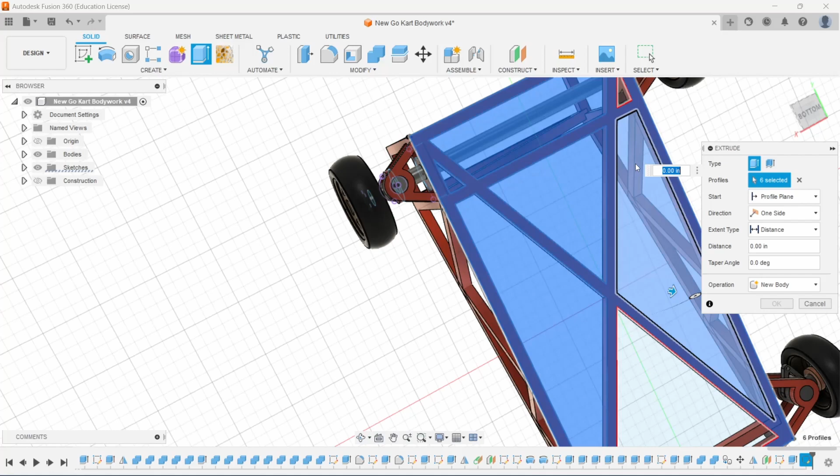I'm going to start off by extruding. I have to select the profile, and select all of this part. I'm going to extrude this about a quarter inch. I'm not going to join it, I'm going to create a new body out of it and make it 0.25 inches. Hit enter. And there you go, we have our floor panel for our go-kart.

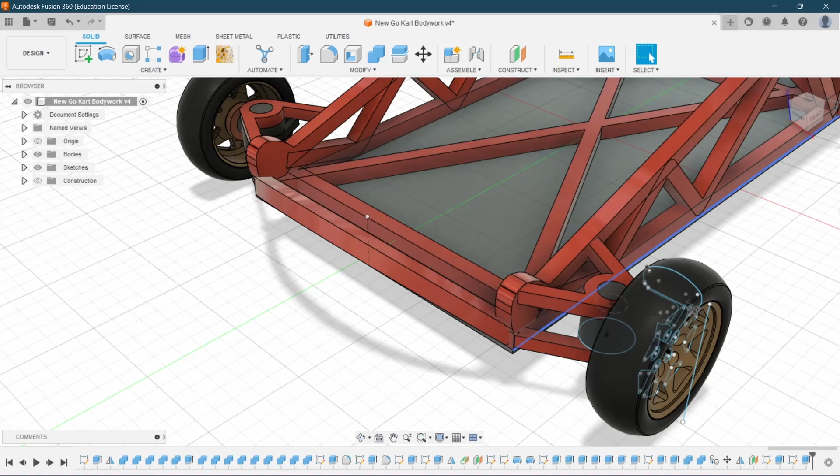Next thing I want to do is design another floor panel for our go-kart, and that will also come up here. Hopefully it doesn't interfere — yeah, it's not.

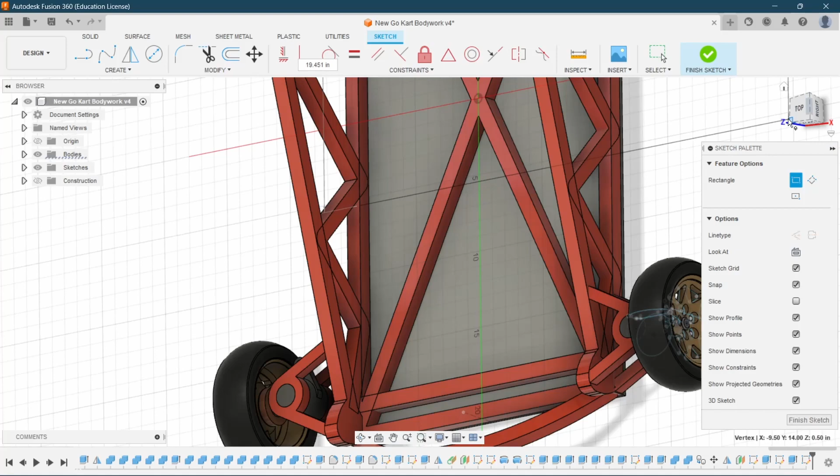I'm going to go up here, create sketch, hover around here, and select this interior piece. I'm going to create a rectangle, a 2-point rectangle, and select this interior, pull this all the way into... let me go around here a little bit. I want to point this just about here.

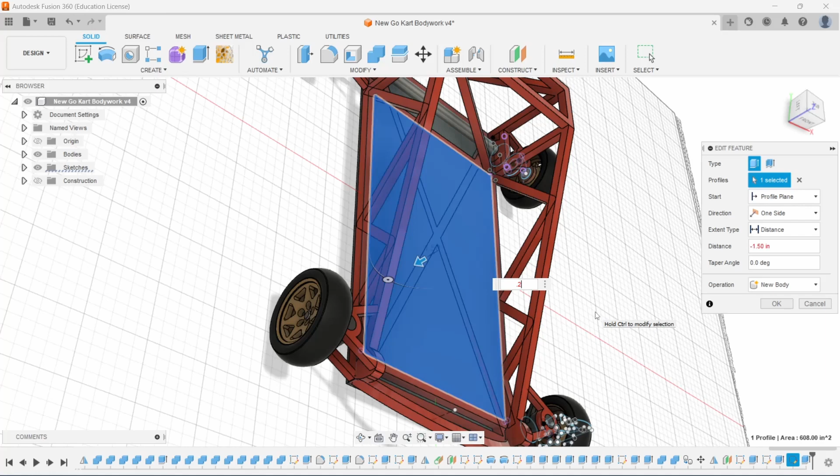That should be great. I'm going to go to solid, extrude, select this part — actually I want to select this part, deselect this one. Then I'm just going to extrude this body and give it a quarter inch. Oop, wrong one, let's go back and edit feature, 0.25. That's a new body, by the way. So let's check this, see if everything checks out. Yep, everything checks out, so we'll click OK. Now we have ourselves a floor panel for our go-kart.

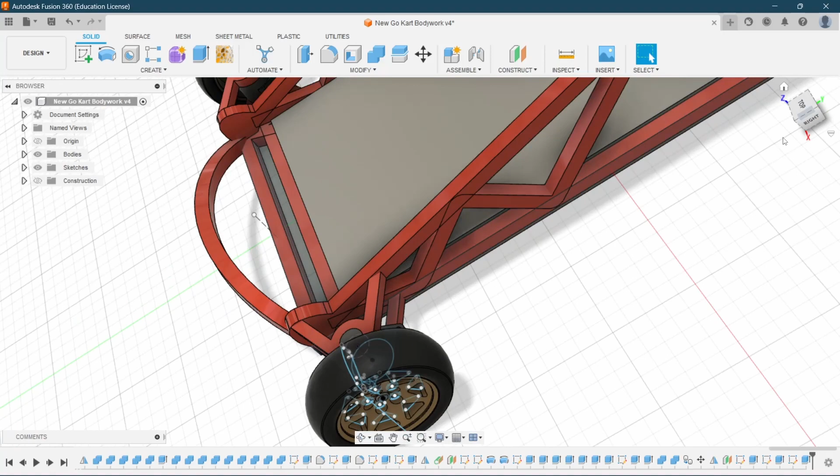That's good. The next thing we're going to be doing is creating our steering rack or control. What I'm going to do is create a pin that goes into this hole and gets bolted down, and this pin is just going to go up into a control box that will control our wheels.

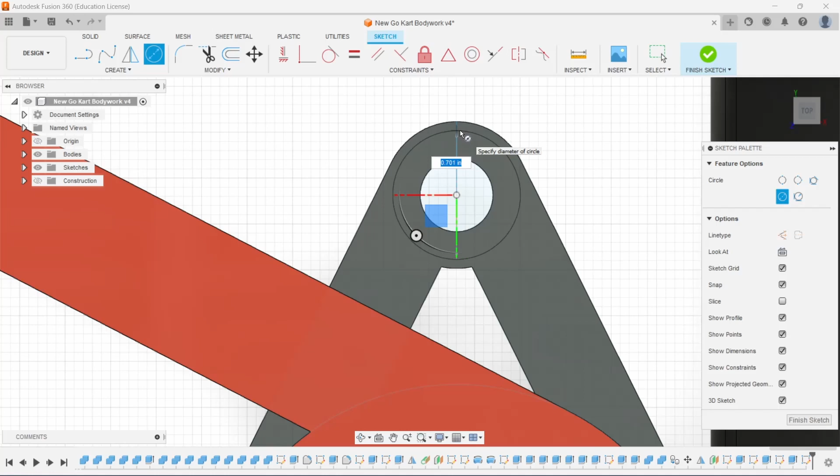I'm going to start off by creating a sketch, hitting this side, selecting circle, and putting this circle up here. Let's make it about 0 — let's try this side. Yeah, and another one, which is going to go in about here. Hit escape.

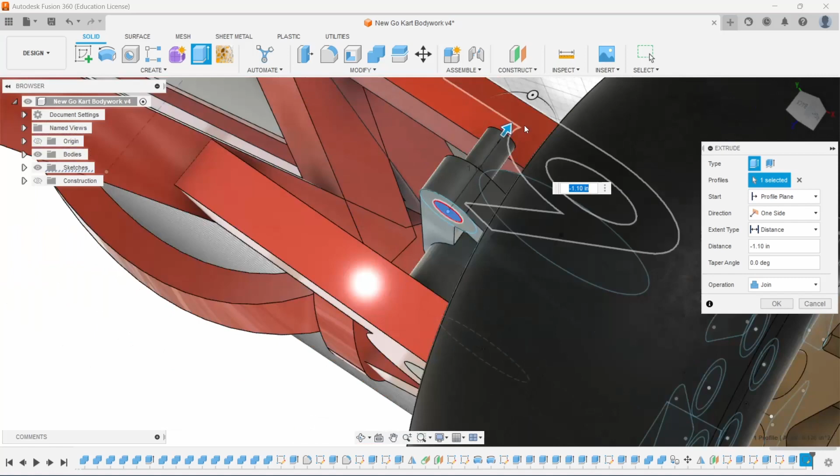First thing I'm going to do is extrude this. I'm going to pull this pin in here, give it about an inch and a tenth, make it a new body, and hit OK. We're just going to go back.

Edit feature again, select this part. Move this — oh, cancel. Here's what I'm going to do: I'm just going to scroll down here, and there you go. That way I'm not going to select this side. So we're going to select extrude, select this profile and that profile, and extrude it.

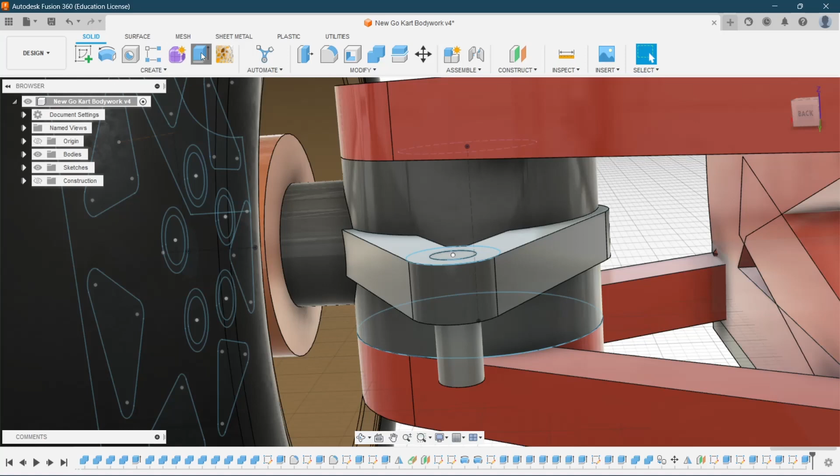That is how I plan on making our... but before that I want to fix — you know what, let's just do it, it's fine, forget it. Let's move this up here about 20, sorry, 20. Then I'm going to give it 0.25, new body, hit OK. Then I'm going to combine this and this body together.

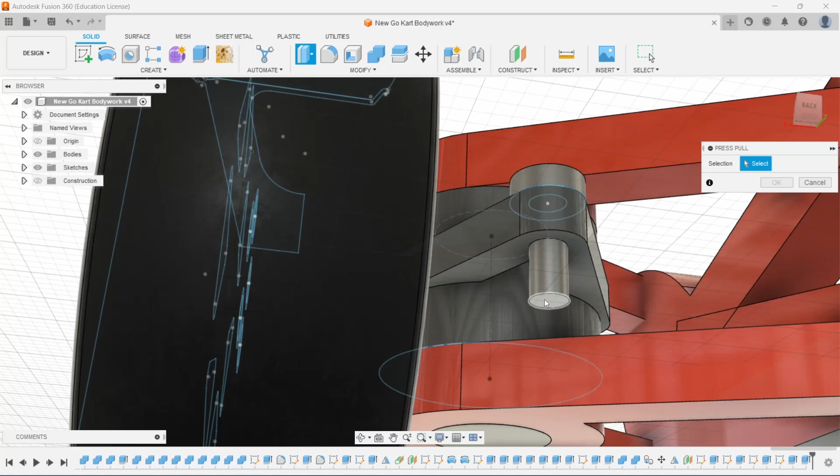Actually, before I do that, let's go up here and... nope, not press pull. I'm going to leave that there like that. Then I'm going to go to create, go to thread, like this side. I'm going to create a thread and modeled, hit OK. And that should be great.

The next thing we're going to be doing is creating the bolt. Let me combine this thread with this body. Now this is one body.

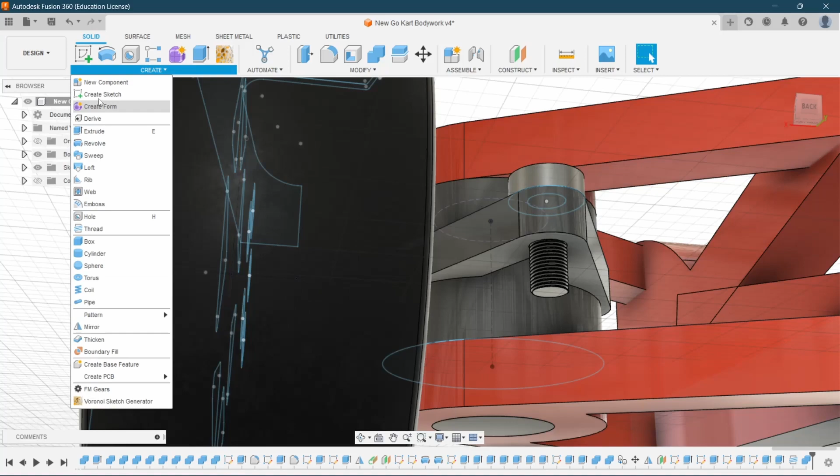I want to create a sketch, select this side, looking for our bolt, select this side. I'm just going to create a polygon, a center polygon out here. I need to find the center point of this whole thing — let me just turn off this body. Let's get this thing in here.

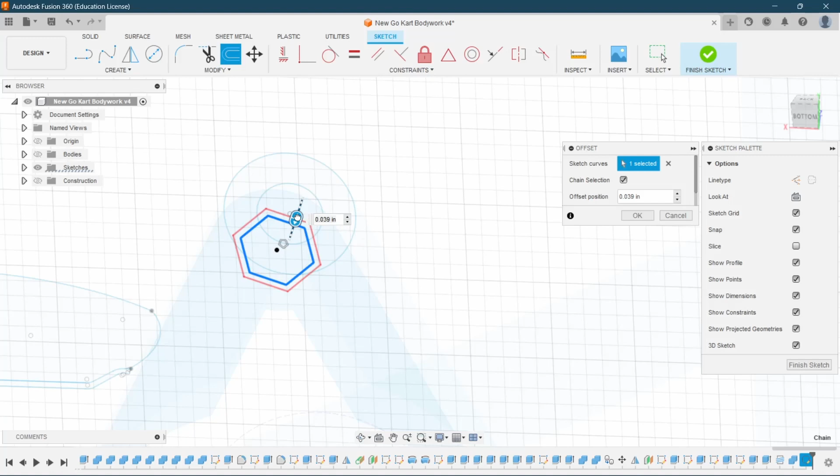Let's extrude, turn the body back on. I'm just going to give it 0.07, hit OK, and extrude. I'm just going to pull this up here — that's going to be the bolt.

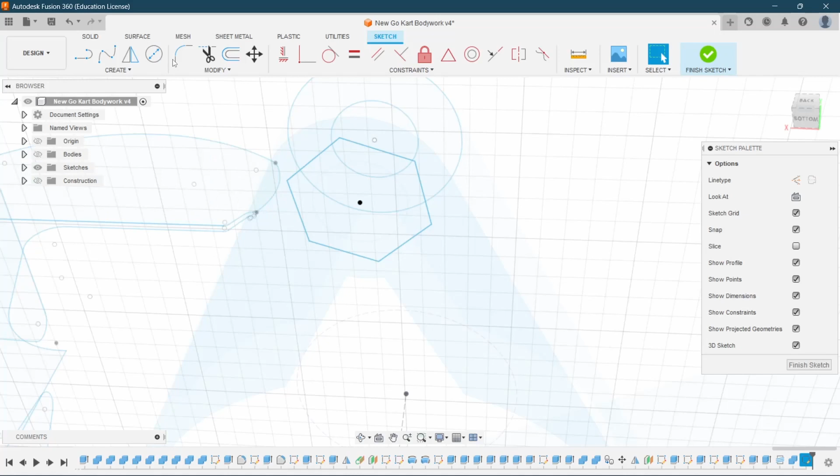Actually, I want to go back. Let's just go back, turn off this body, and I want to delete this. Let me just delete this part. Delete — go on to the center circle.

Let's see how much escape. Let me hit escape, let me see how much this is. This is 0.4, so I'm just gonna select this and go on to 0.4. Yep, that should match up.

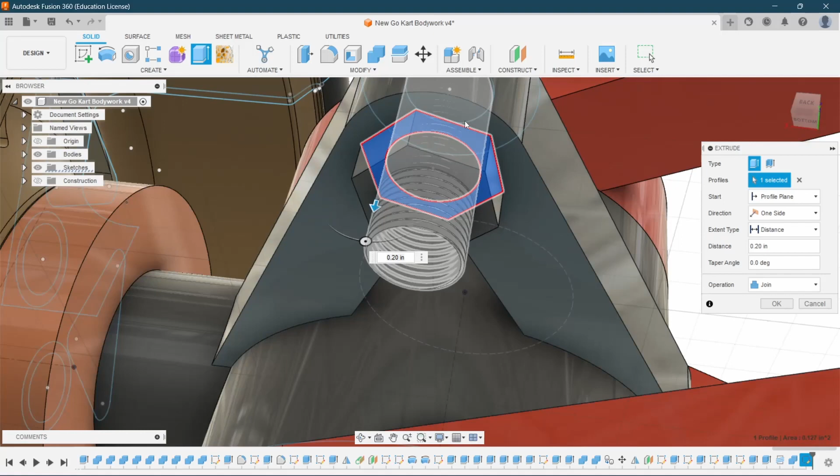Turn the bodies back on, and then we're just gonna select our extrude command. Just bring it down. And this is our nuts. So click new body and hit OK.

I'm gonna go in here, actually into the bodies. I'm gonna go down here and this one, just turn this off. Go on to thread, select the interior, thread it up, hit OK. Then we should be perfect.

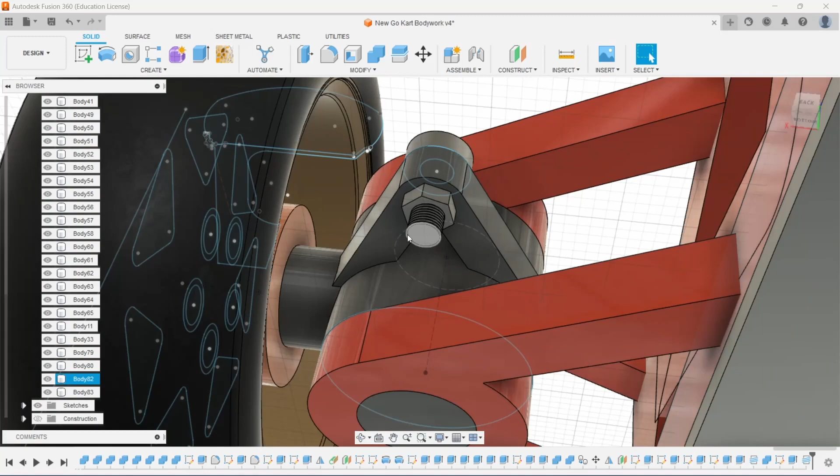Next thing we're gonna be doing is create sketch, on top of this, there you go, right here, top right here. I'm gonna select the line and pull this line from the top. Hit escape, let me just go out here.

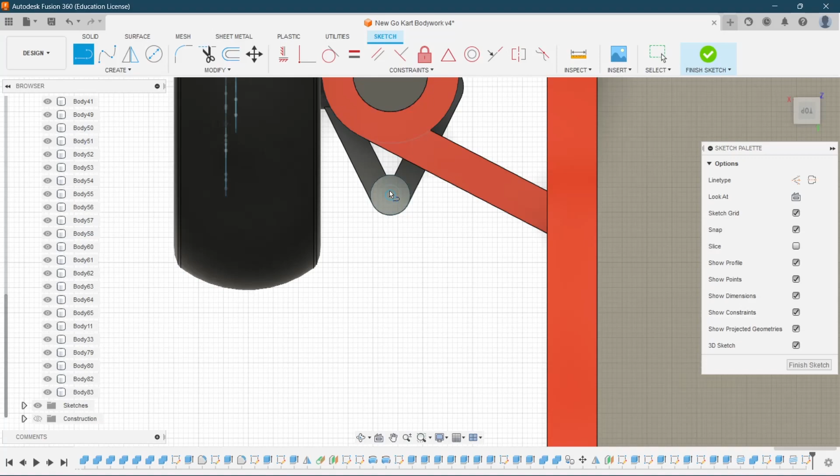Select this side. I'm gonna pull this line in the middle. Escape. Do the same thing on the other side, pull the line from the middle and join it out here and hit escape. Let me check, see if everything is good over there. Yeah, everything's great.

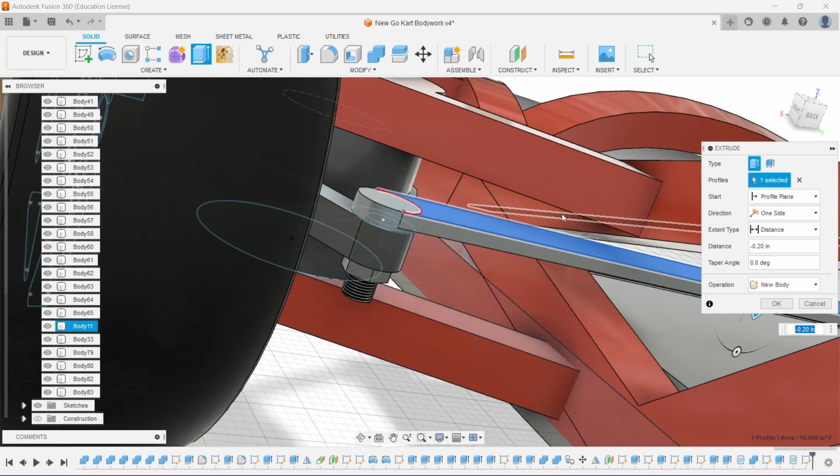Just gonna go into solid, extrude, select this, join. Actually gonna create new body. Deselect this. Go all the way down here. This is good. Then I'm gonna click OK. Go to here, select this pin, and then you have yourself a new

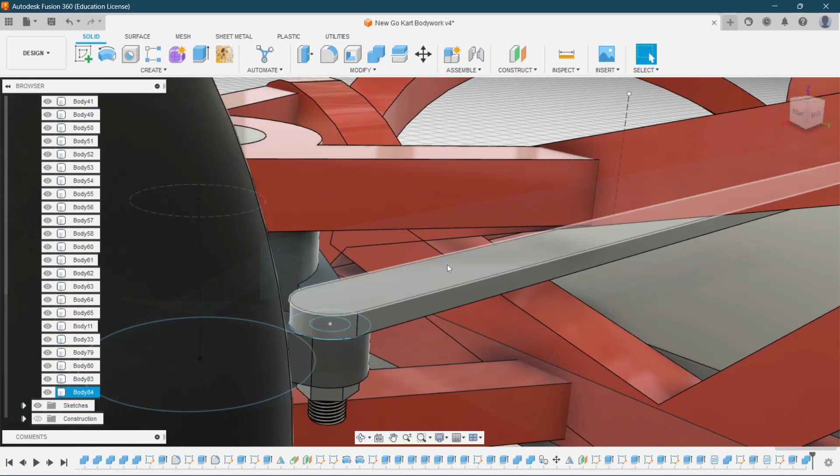pinned body right there. Now that looks really tight in the space over there, but I think there's enough clearance over there. Yeah, I'll take it.

So what I'm gonna do next is create a box, and this box is where it's gonna house our gears that control the steering of our wheel. That's the little gearbox that does all that work.

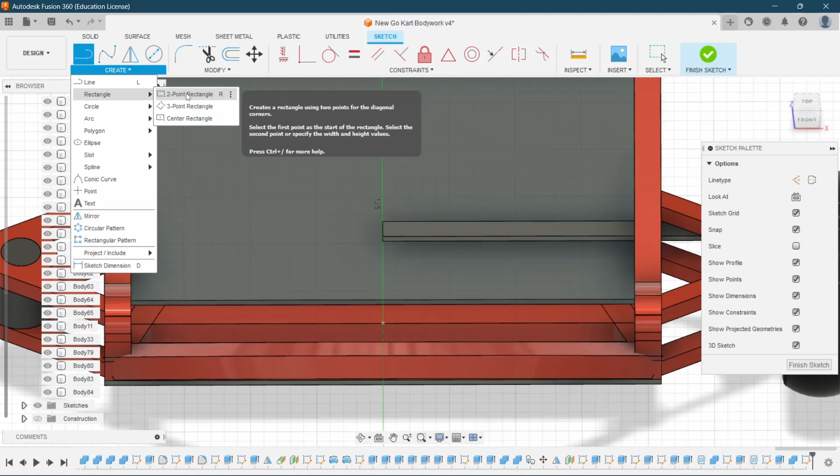Just gonna create sketch again, select this plane. Then I'm gonna go out here, rectangle, center rectangle. Select this center rectangle. Then we're just gonna go up here like that. Yeah, I think I'm hovering, but it's fine.

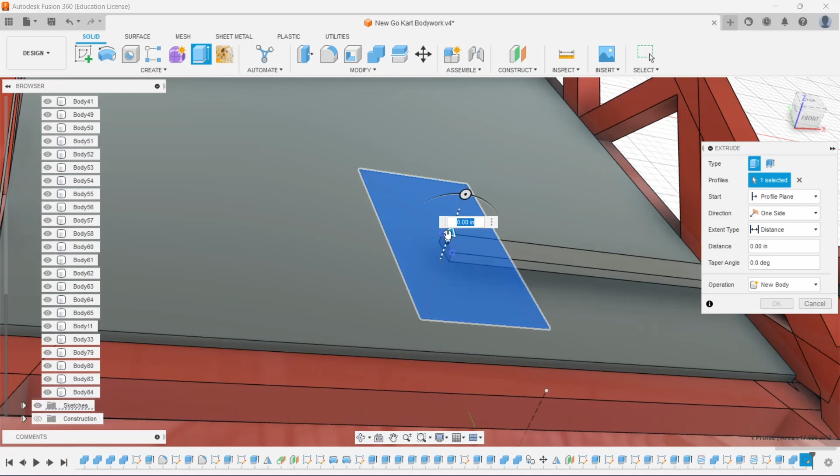Next thing we're gonna do is create sketch. Go to solid and just select this side, two sides. Just gonna pull this side. This side should be a join. And I hope I'm not joining. This side, side 1, side 2 operation is joined. This should be a new body.

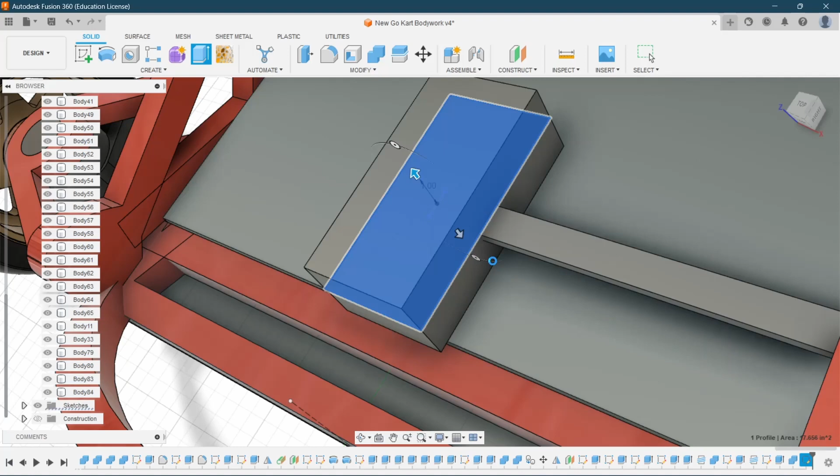And this is where our steering mechanisms are gonna go. I'm gonna hit OK, and that creates a new body for us. Let me check it from this side. Okay, that works, gonna press pull.

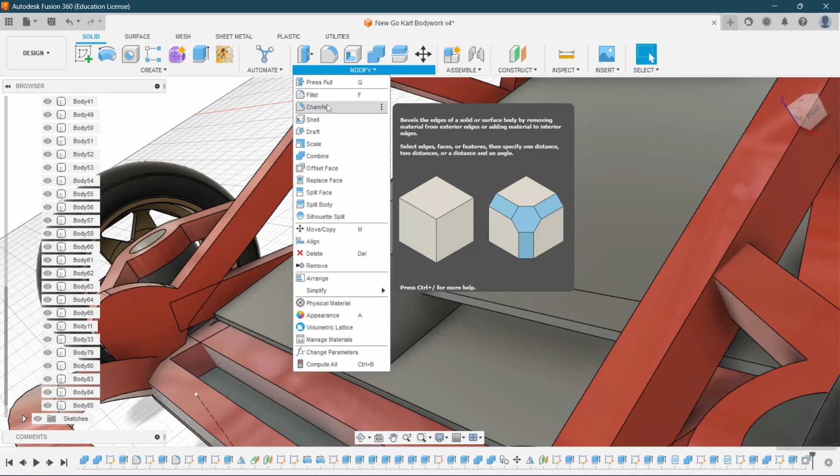Fix a few issues here. Press pull on this side. No, cancel. Press pull from here, just gonna press pull. Hit OK. Then I'm gonna chamfer. Hit OK, do more press pulls right here. Okay, tiny bit right here we should do.

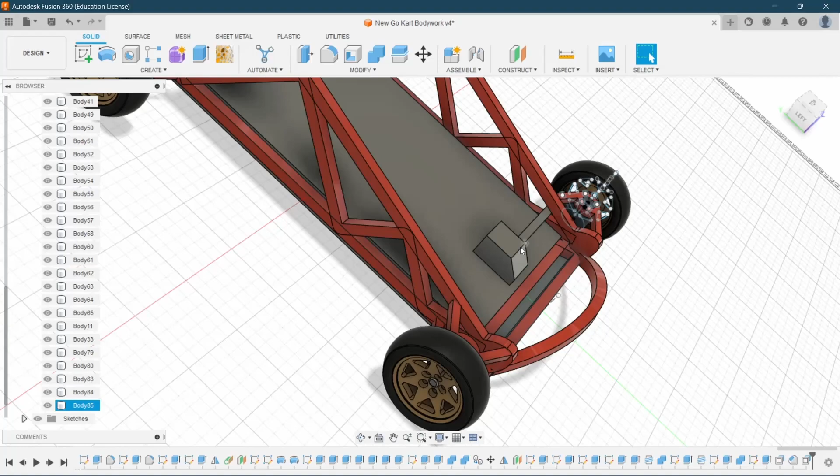After doing this, next thing is go on to the mirror command. Select this and this. Select our mirror plane, and there we go. We have our steering column, new body. I could just join this, but I'm gonna keep it new body. That's new body, I'll join it later.

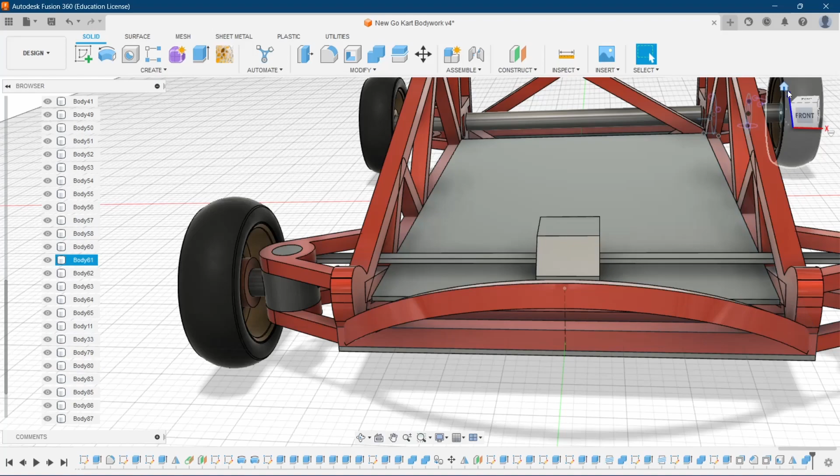Let's see, combine. So this and this combined. And there you have it, that's our little steering column with our, yeah.

Next thing we're going to be drawing is our steering column. And for the steering column, I'm just going to create sketch again, select this side, select line, and select the midpoint of this.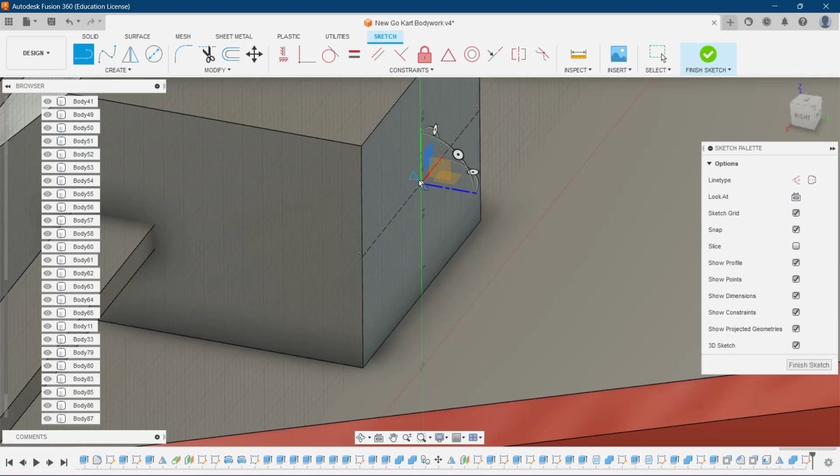Turn this line, let me turn this line into a construction line. Oh, turn it back off. Hit escape, select line, go into the midpoint, select this plane. And do I have sketches off? Let's see, okay, sketches aren't off.

So from this point, I am going to draw our steering column. I need to place it about, let's see, 60 degrees, let's try 45, 50. This is 45, I think that's too tall. Let's just bring it down a little bit. 50, we'll do 50 degrees. Let's go to 50 degrees.

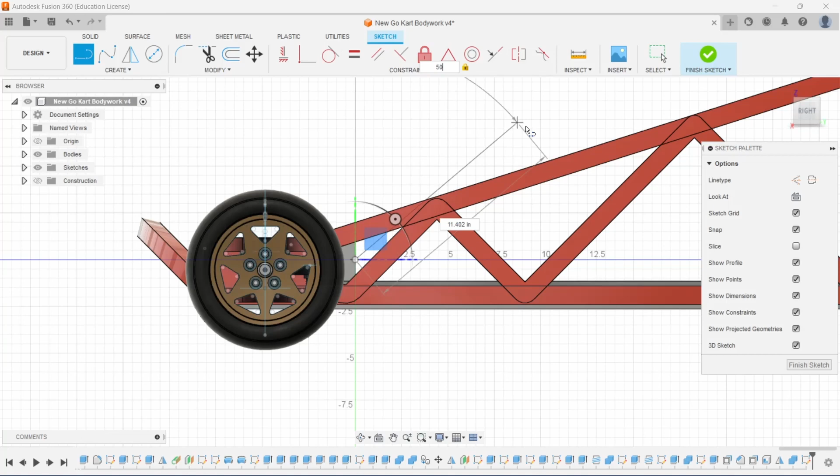55, let's see. Let's try 60. So that should be 58. Let's see, 57. I think 57 is a sweet spot right there. Tab 13, 12.5, let's try 12.5, 12.5 should do. Oops, 12.5. That should be okay.

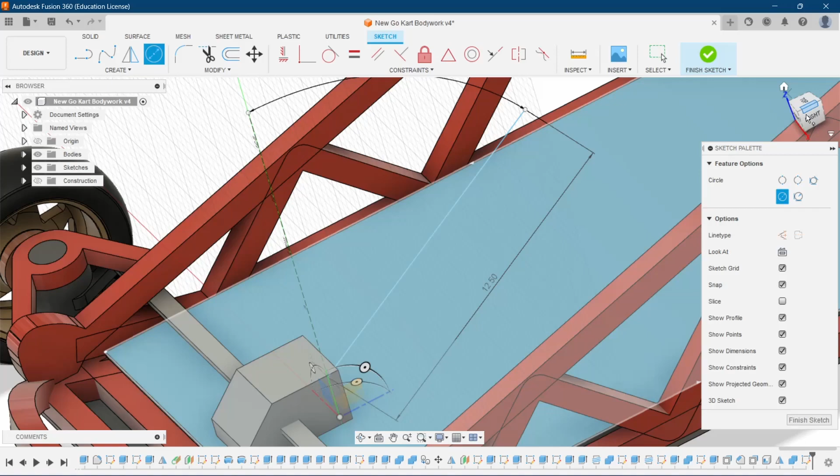Next thing we're gonna do is go into create circle, and we're just gonna give it an inch. Go on to pipe, solid, and go on to pipe, select a pipe. It's too big, so let's just, section size should be about, let's try an inch. New body.

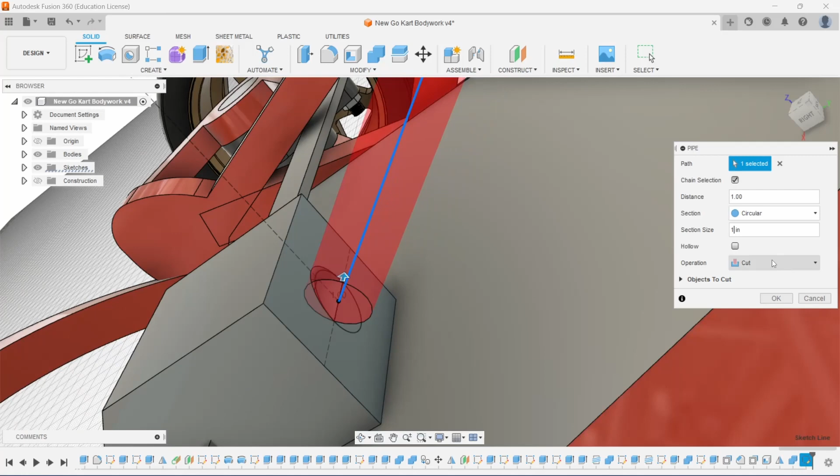Circular, hit OK. Next thing we're gonna do is edit sketch, and pull this at 1.5. Finish sketch.

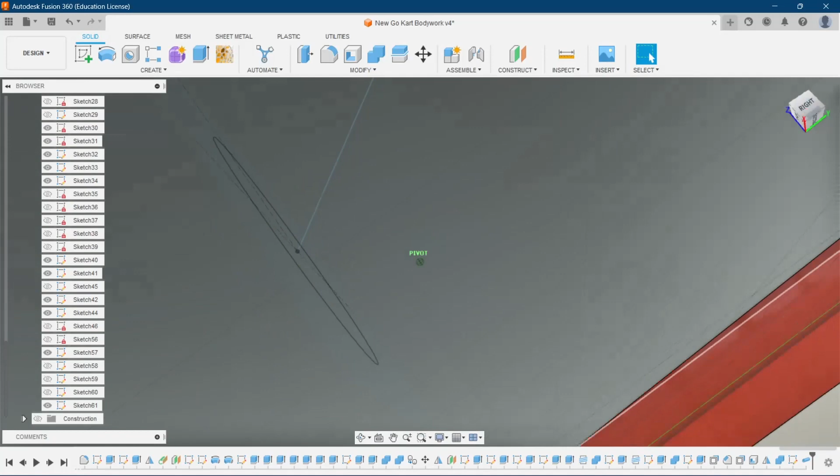Then let's see, this is so hard to see from here now. Press extrude, go inside. This is the new body. Just combine this and this, and hit OK.

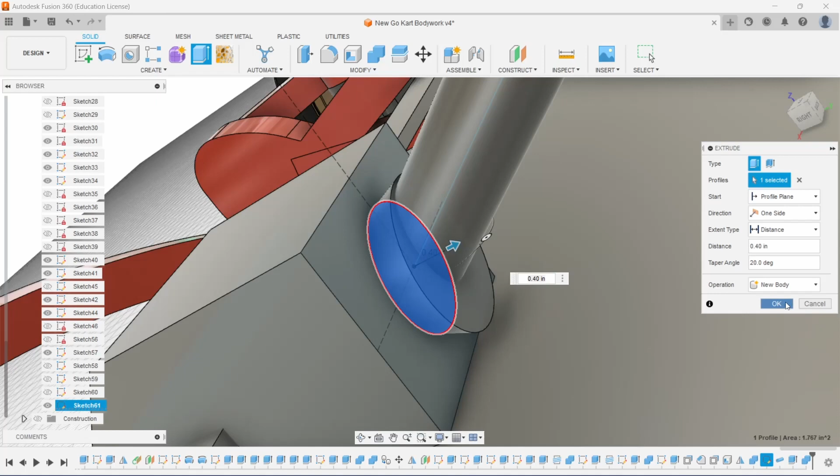Then I'm gonna click extrude, poke out this way, give it a taper. 0.40, new body. And from the taper, I'm gonna click fillet. I should create our steering column. That's perfect.

The next thing that's going to be done is creating our steering wheel, and that will also come right here. Let me see what... I want to go with like an F1 style, like a Formula 1 style racing wheel. So let's see, I'm just gonna go into create sketch.

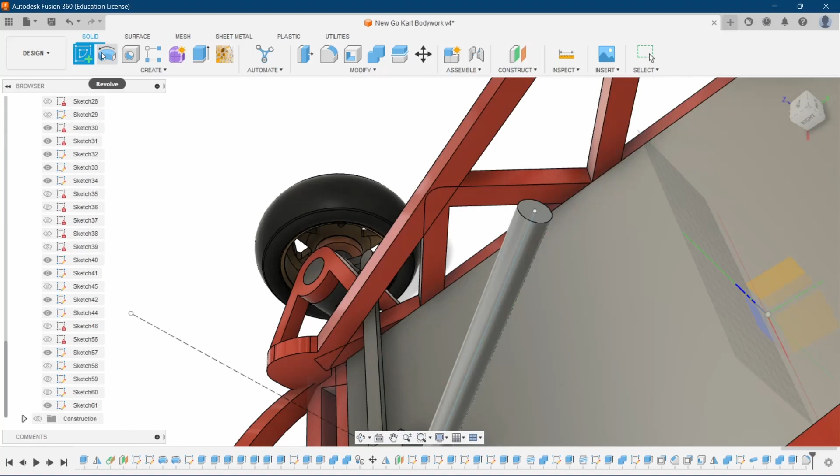Then go to circle. Let's put this at 1.5. Oh, that's 1.7, 1.7 should do. Then just gonna extrude. Put it at, let's see, 0.7. This is also a new body.

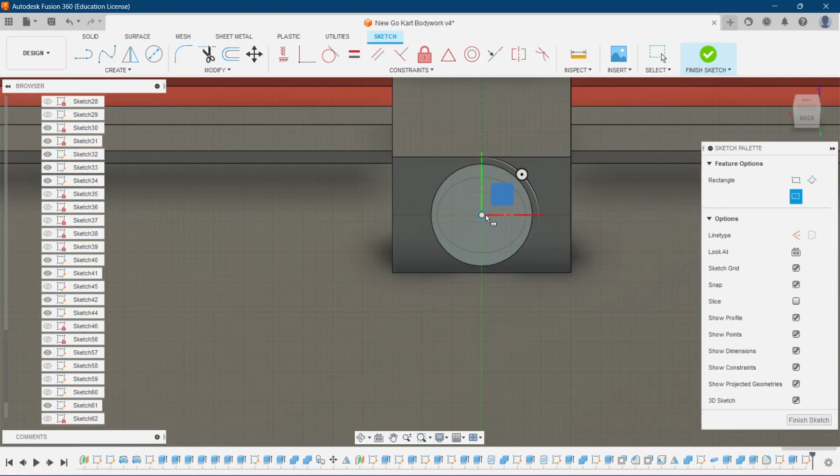Next thing I'm going to be doing up here is creating sketch. Again, go to rectangle, center rectangle. So like this. And I think about, let's see, how big do I want this to be? Let's see, tab 4, tab 8.8. Hit OK.

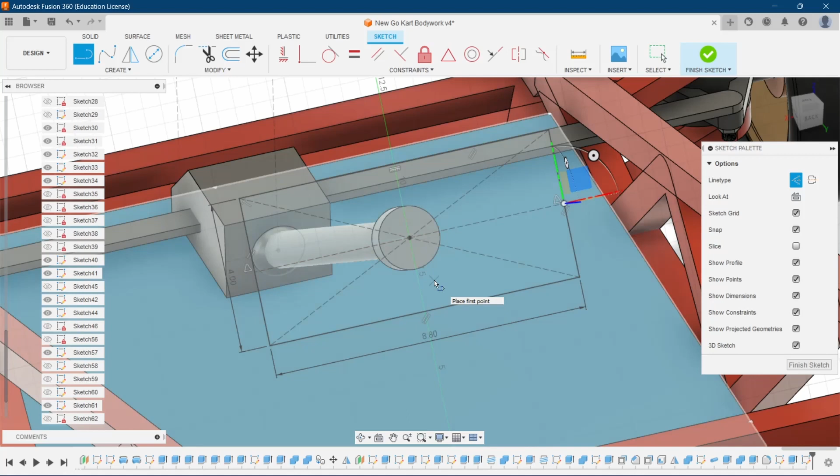Okay, next thing I'm gonna be doing is create sketch. Go into use this construction line right here. Then I'm gonna go on to rectangle, center point, turn this off. Then I'm gonna create the handle for our wheel. Should be about, let's see, okay.

That's not gonna work. I'm going back. I'm going to create a normal steering wheel. I'm gonna create a normal steering wheel this time around. I don't like the racing style, it's not gonna work.

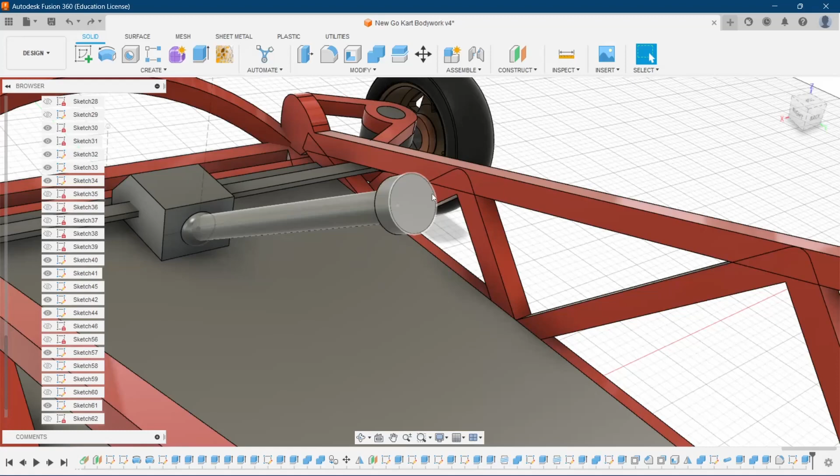Create sketch. Create a sketch from here. Then I'm going to undo, let's just undo this. Go on here, edit sketch. 2 inches, finish sketch.

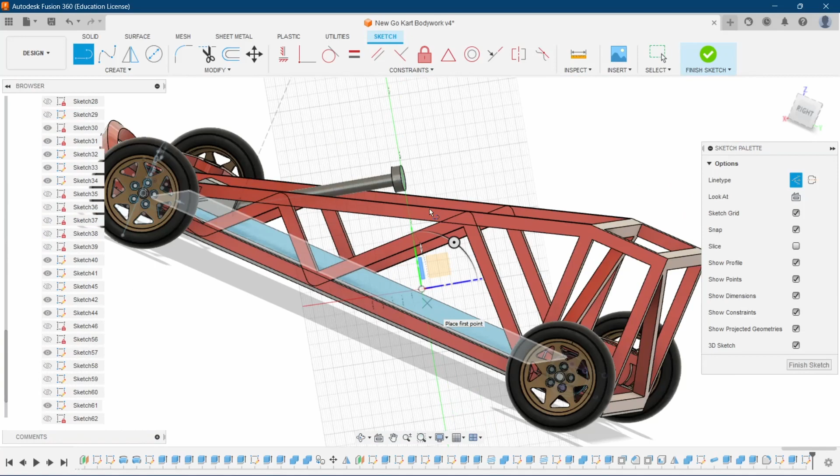Create line, this line, construction. Select the center point. And I want to give it about the side, I select the side. 2 inches.

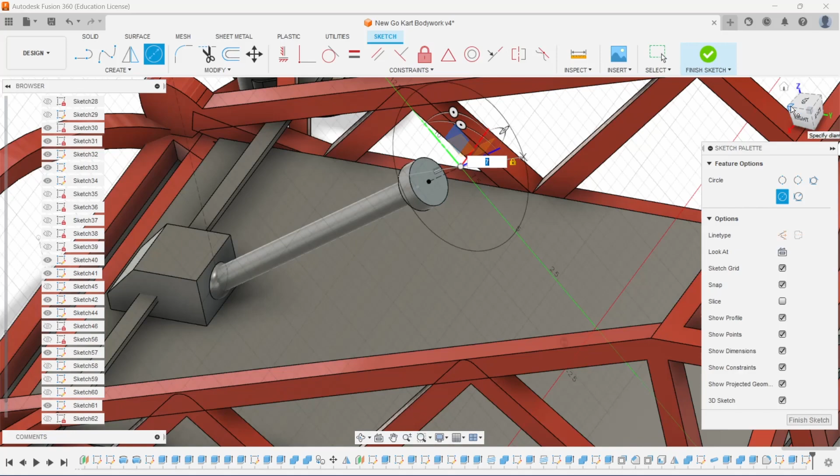Turn off this, and our steering wheel is gonna go out here. So let's put it at, let's see, 5 inches in diameter should do. No, let's try 7 inches. I'm trying so hard to make things drawn to scale, but this is not everything in here. I keep telling everyone, everything in here, it's not drawn to scale. If you were to try to make this according to the specifications over here in real life, it's not gonna work. So we're just gonna put this at 7 inches right here. Hit OK.

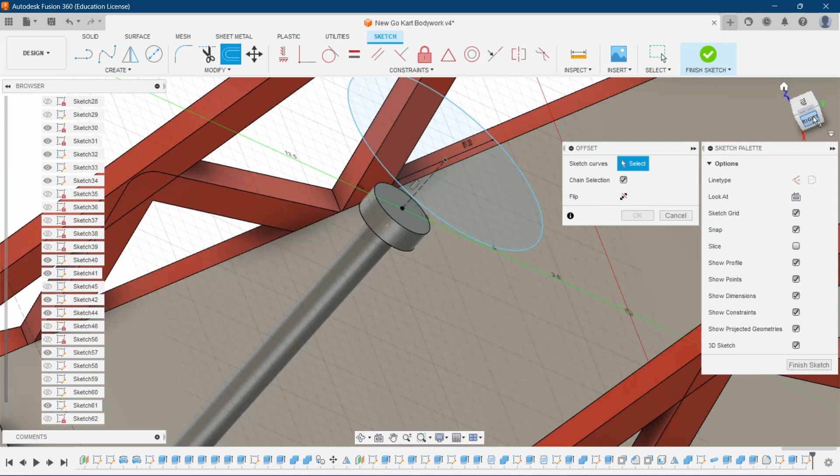Also, I think this side, we'll work on that later. Next thing I'm going to do is offset. Select this. Okay, that's not working. Offset. I guess that doesn't work.

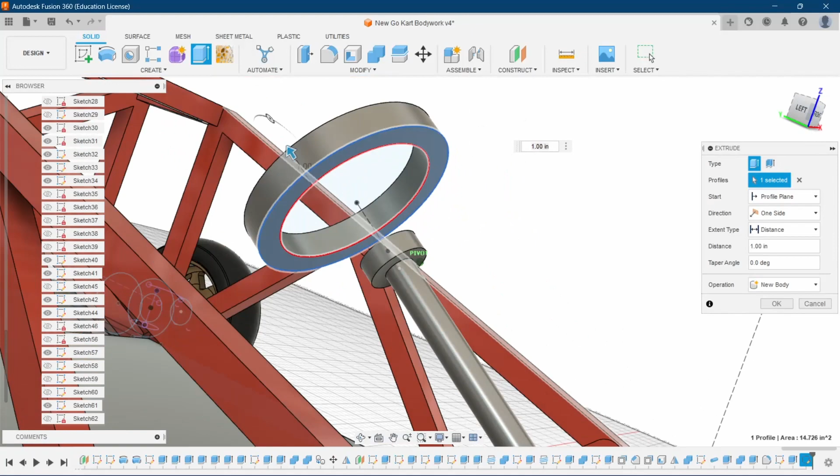So we're just gonna go into the middle, create a circle, create this. Gonna put about 5.5. Then extrude, about an inch again. Once again, 0.7. 0.7 is always a sweet spot for me, in between 1 and...

So the next thing is going to create our sketch again, and I'm going to create the points at which the steering wheel connects to the little metal bars. I forgot the name, oh, you should know what I'm talking about. So I'm gonna go up here, create sketch from here.

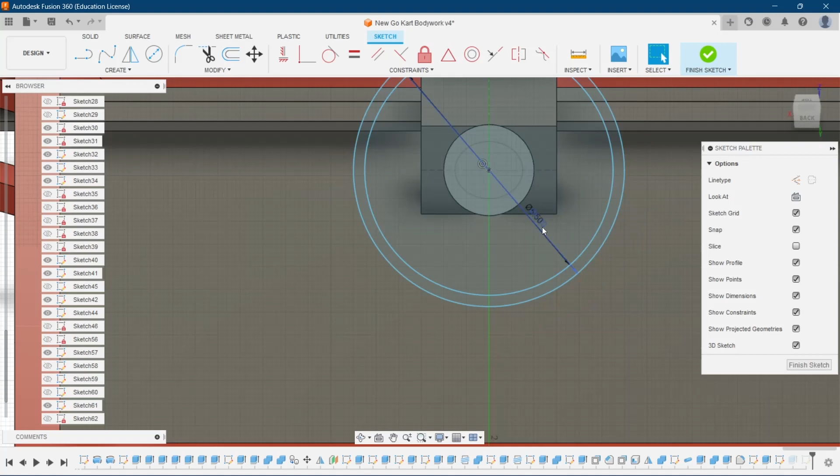Then I'm gonna select line. Our line is gonna come up here. Before anything, let's just go back here, edit the sketch. I find this too big. Put this at 6, and this should be 4.5. Finish sketch.

Perfect, that's a little bit better. And create sketch again, go here. Select that line. Just gonna select this outside. Select this side.

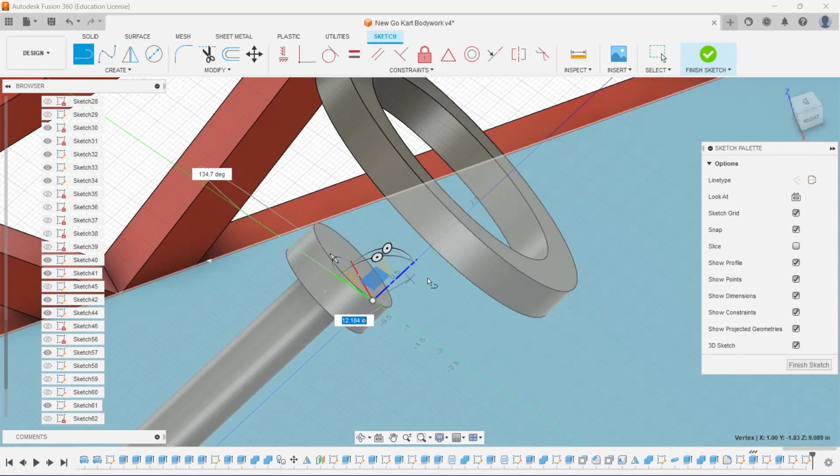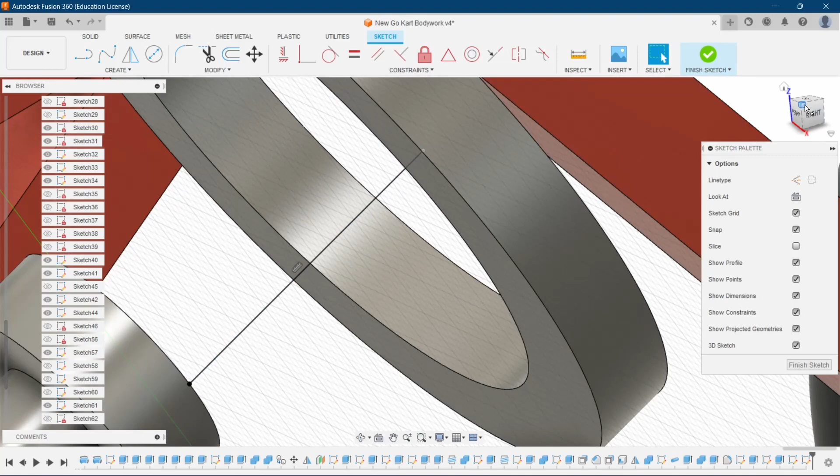I want to make sure if I can clip from here, let's see. Hit escape. I hope I made contact. Nope, I didn't make contact. Undo.

Go on to the bottom side, let's try the bottom side. This here. Turn off this body. I'm gonna select this side.

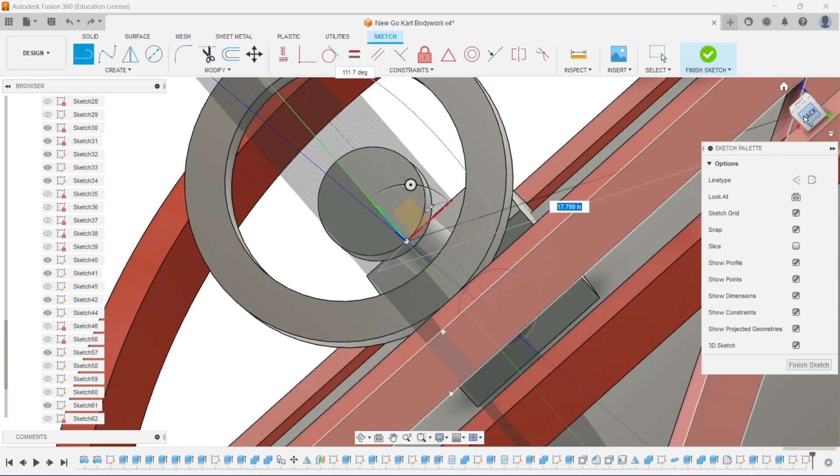And here comes the tricky part, it's always so tricky to do this. Hopefully I make a connection. I think I did. That's perfect.

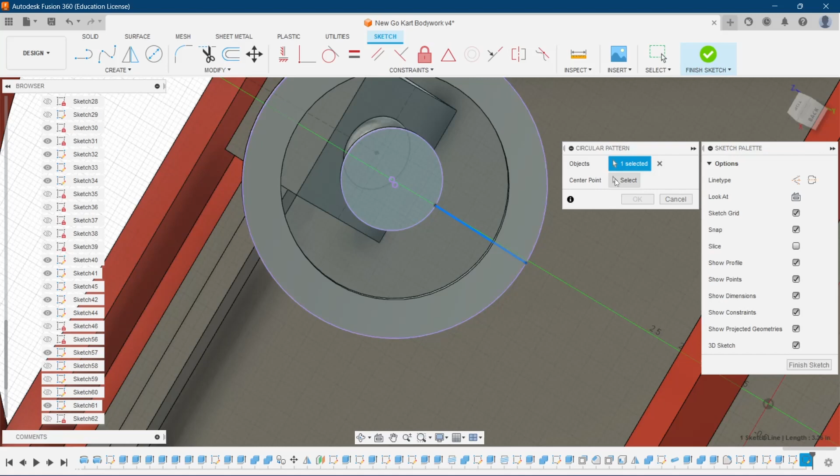They match us up. Next thing we're gonna do is go on here, circular pattern, select this, select our center point, and there you go. Everything should work out now. Hit OK.

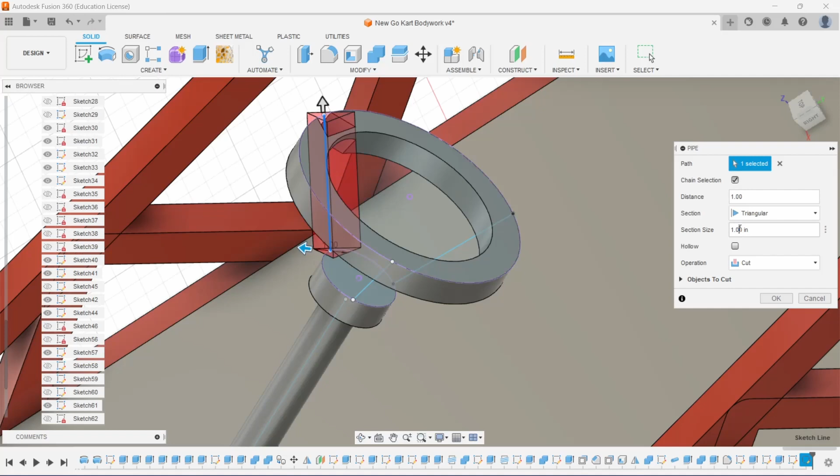Then I'm gonna go up here, go on to pipe, select this. Let's see if I can multiple select this one. Okay, that's not working either. So let's see, I'm gonna go on with a triangular look with a section size of 0.5. New body. Yep, that will do.

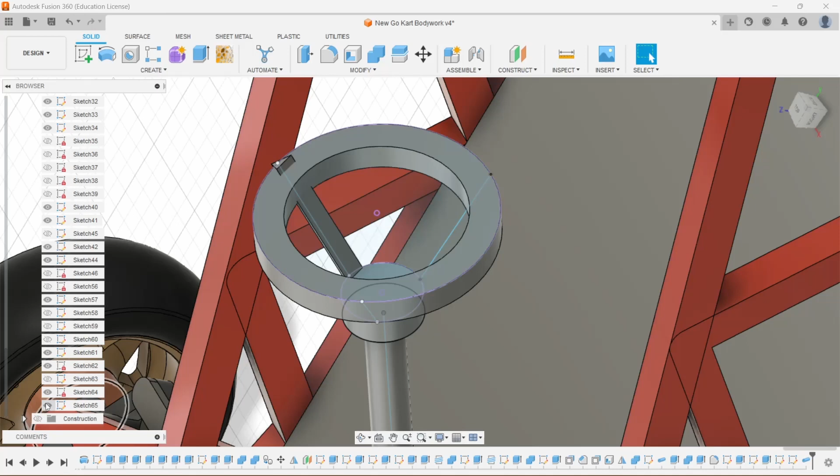Put that here. Oh shoot, 0.5 again. New body, hit OK, same thing. That's just gonna happen right here. Yeah, that's the same thing we're gonna do right here.

So we're just gonna go up here, go on with the pipe again, select this, and select this, should be it, 0.5.

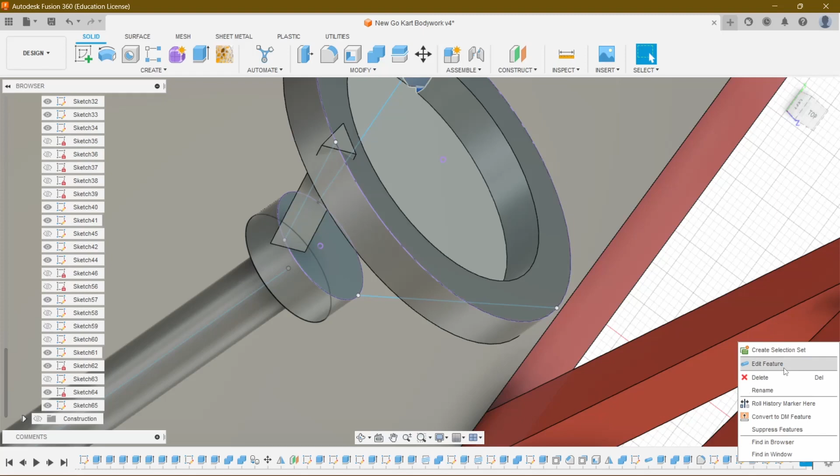Hit OK. Oh no, that's terrible. Redo. Let's just add a feature. Create new body, turn off the hollow. Click OK.

Now let's see, here's what I want to do. I want to take this part and rotate it. Let's take this piece right here, give it a nice rotation. Oh, cancel. Rotate.

I need to rotate on the axis. Rotate, rotate, rotate. This is a 90. It's a 270. Hit OK. And that should be perfect for me.

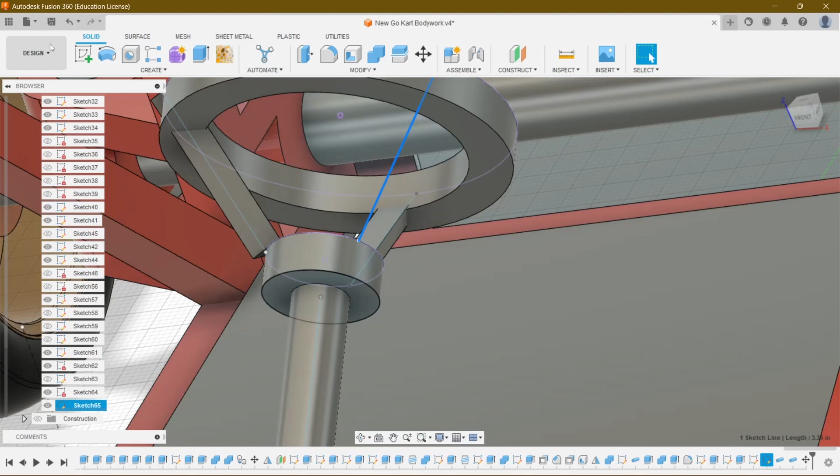Next thing, again, one more. Just click this. Then I'm going to select our pipe tool. Turn off hollow. Turn off cut. Click OK.

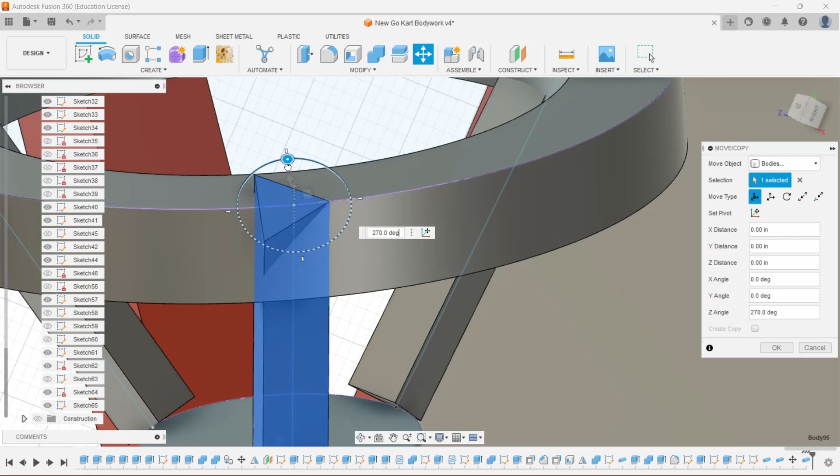Okay, next thing to do is rotate this again. I'm going to select this, select the midpoint, right there. Give it a rotate, about 270. Let's bring this up a little bit. Hit OK.

Yeah, I like this, this is good. So we're just going to finish this part.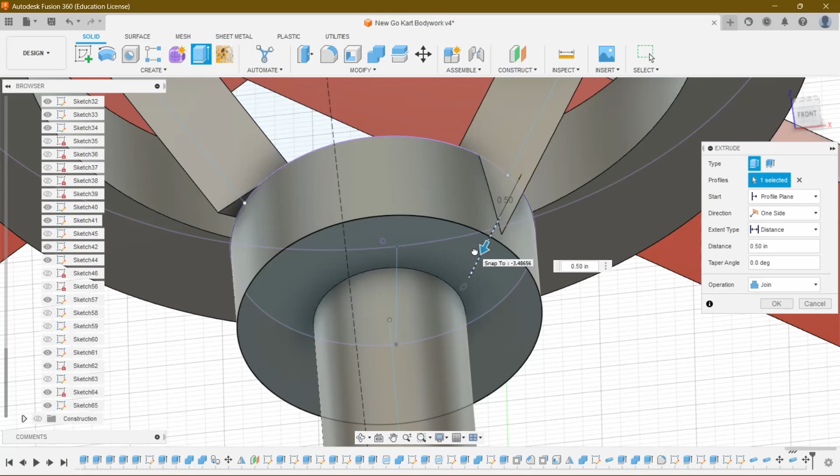So what I'm going to do next is extrude these things in there and do some fillets and round these edges up, and everything should be perfect. I'm going to continue keeping these bodies as separate bodies. So yeah, just going to break this up a little bit.

5 should go there. Extrude. Cancel. Let's go in with the press pull or extrude. Let's try extrude. This one. Okay, we can only do it once I guess. Or can we? Let's try it. Extrude, select, shift. Okay, so it doesn't work.

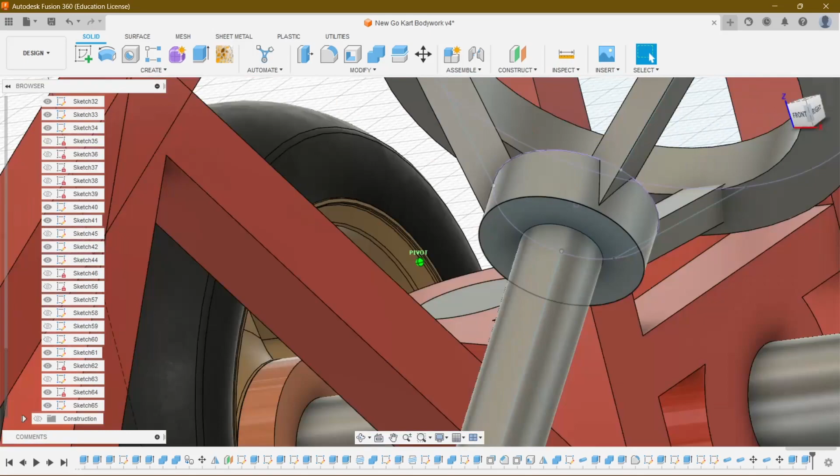I guess one, extruding it. That's good, 50, extrude it at a 50. Guess this closes in at the 40, so just click OK. I love this, I love this. This steering wheel looks good.

One more extrusion. We'll be doing the same thing over here. Press pull. 40. Let's try and see if I can do this multiple faces with this. Also, so press pull works, but extrude doesn't work.

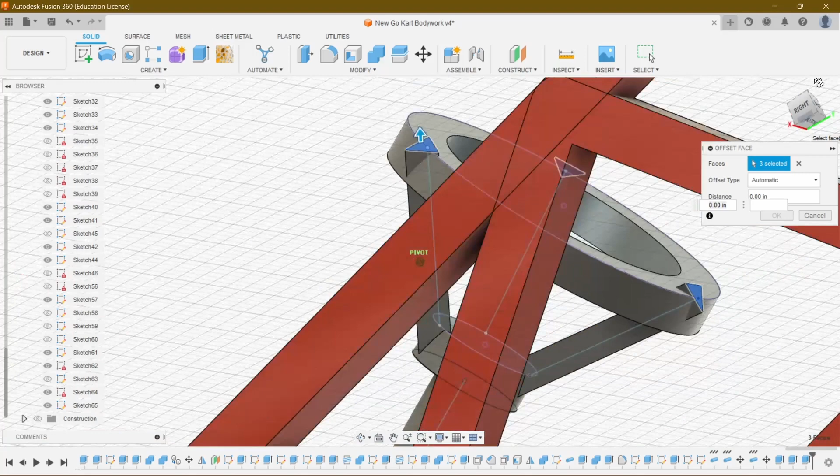Just going to push this all in, and here, tuck it up, tuck it all in here. Just tuck it all in here. You know what, I'll leave this. I want to leave this. The reason why I'm leaving this is because I want to round this off before I try to extrude anything. I don't want any weird things sticking out. Just going to press pull, just like this. Like the interior.

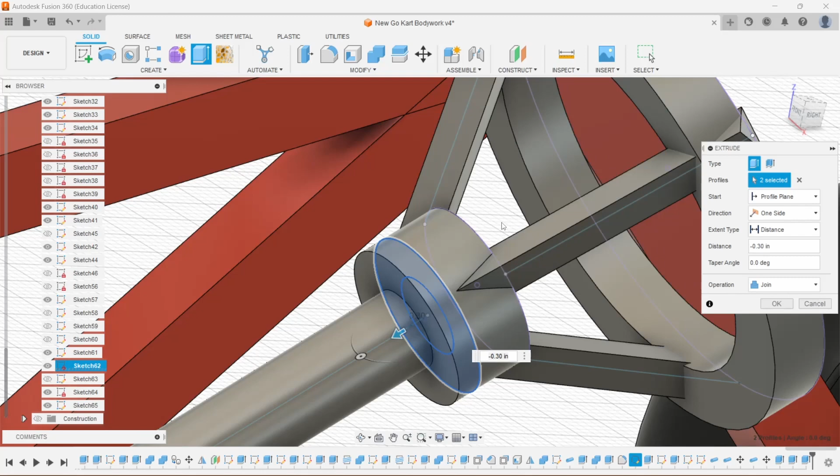This is new body. Oh, this is join. Sorry, join. Undo. Let's see, I want to bring this down a little bit.

Edit sketch. Seems to be too close. Let's bring this down a little bit. 11. Finish sketch.

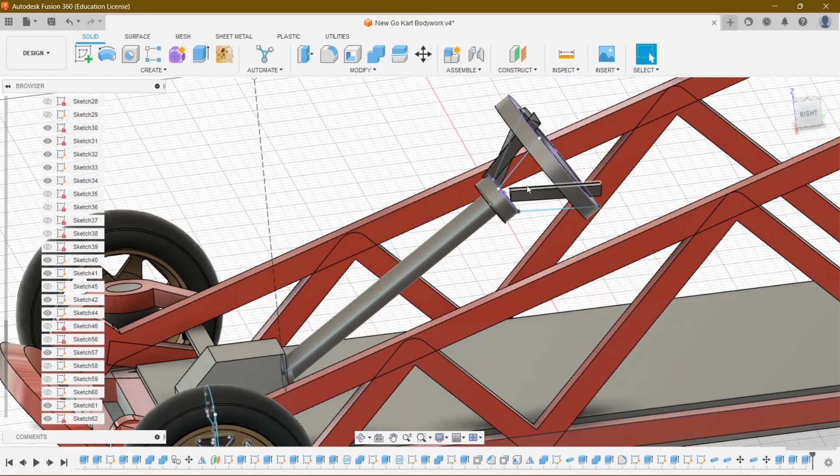Ooh, and that doesn't work. Let's just go back and undo it. Let's give it a turn to 12 and let's see, finish sketch. Let's see what happens when I turn it to a 12.

Yeah, undo. Let's see. Undo. Let's finish sketch. Turn off this little body. Let's keep it for now.

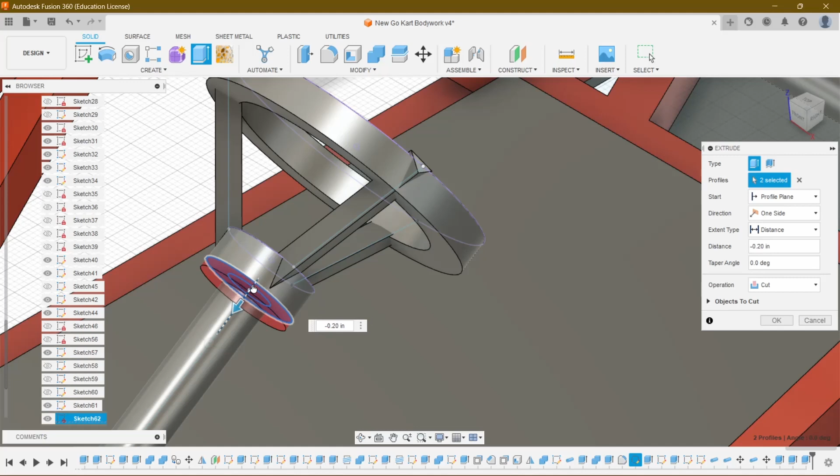So the next part, let's try extruding this right here, just a tiny bit. And put this right here. Five should be good, yep.

Combine this with this. Oh, this was a new. This combined it, okay, I see. Hit OK.

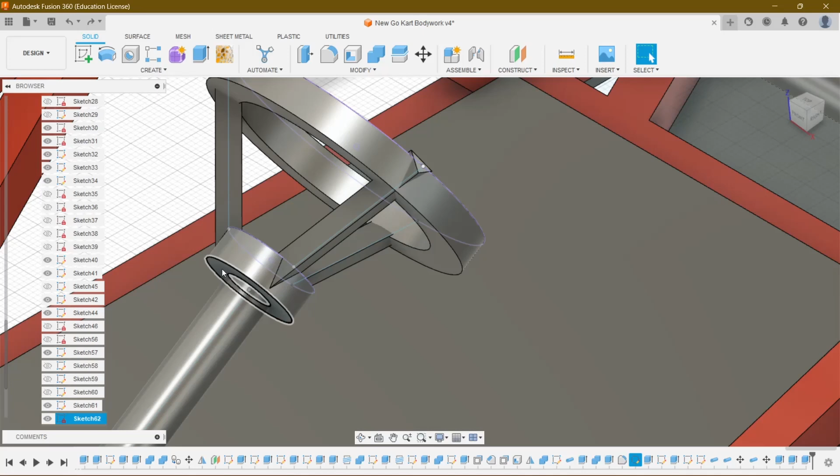I have this weird line right here. That doesn't work either. I could just leave it. Oh, let's try it, let's try and extrude this side. Yeah, I'll leave it, we'll leave this line right there.

Fillet. The next thing we're going to be doing is filleting, and I want to see if I can fillet this side. Yeah, perfect, this is just good, I like this. This is perfect, give it 20.

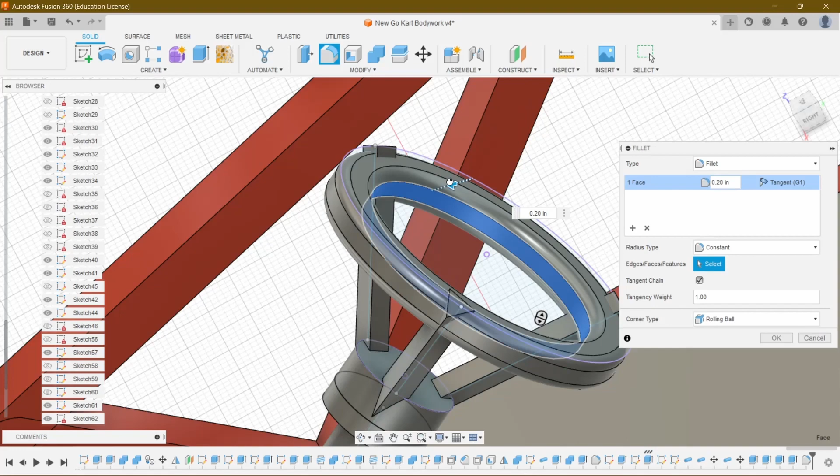Fillet it again, this side, this time the interior. Just going to give it a 20. Should be perfect.

Press pull, select the faces. I want to press pull and just push this in. Hit OK. That should be great, I like this now. Yeah.

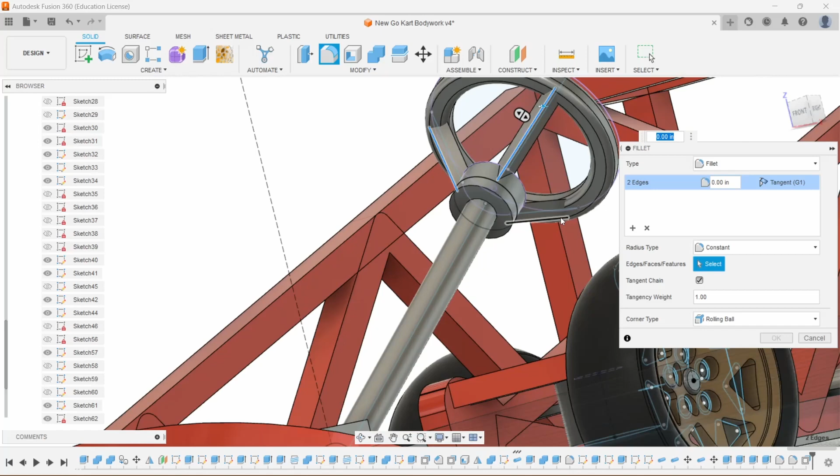Fillet the sides a little bit. Just going to hit OK. And there you go, there you have it. This is our complete set. I'm going to go into sketch.

Actually, let me just finish this side off, round this edge off. Undo. Just going to round this off and end it. Round it off right here. I think this should be it. Yeah, let's keep this side, let's keep it like that.

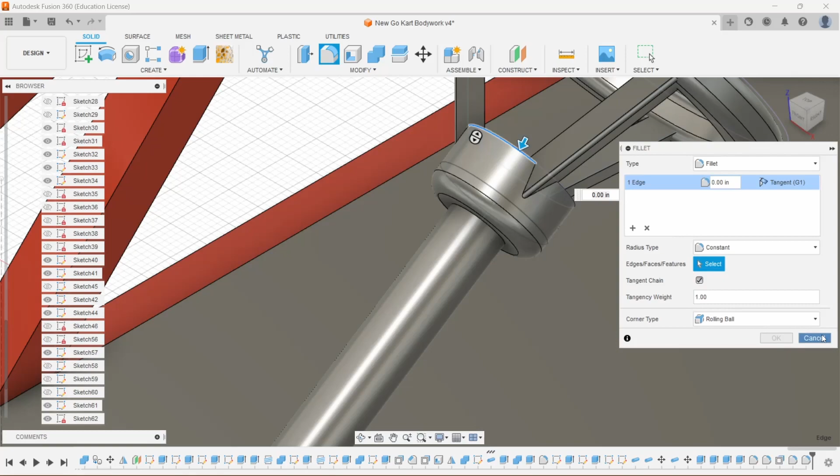Yeah, so I'm going to end it off for today right here, and I'm just going to head up to render, render some stuff, and I'll be back.